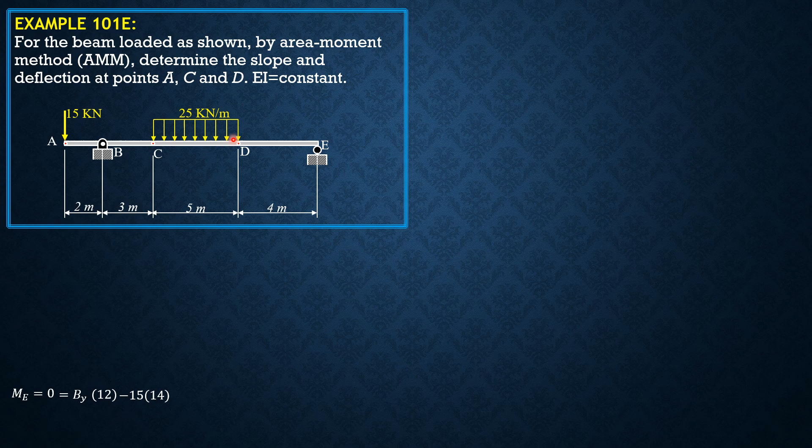So moment at E equals 0, clockwise positive, let's assume an upward reaction at B; horizontal reaction is 0. So we have By times 12, minus 15 times 14, minus 25 times 5, 2.5 plus 4 is 6.5, so 25 times 5 times 6.5. So By is equal to 2045 over 24 kilonewtons.

Then moment at B equals 0. So we have RE times 12 plus 15 times 2, then minus 25 times 5, 2.5 plus 3 is 5.5, so 25 times 5 times 5.5. RE is equal to 1315 over 24 kilonewtons. So from there, because we select D as the moment center, this is 1315 over 24 EI.

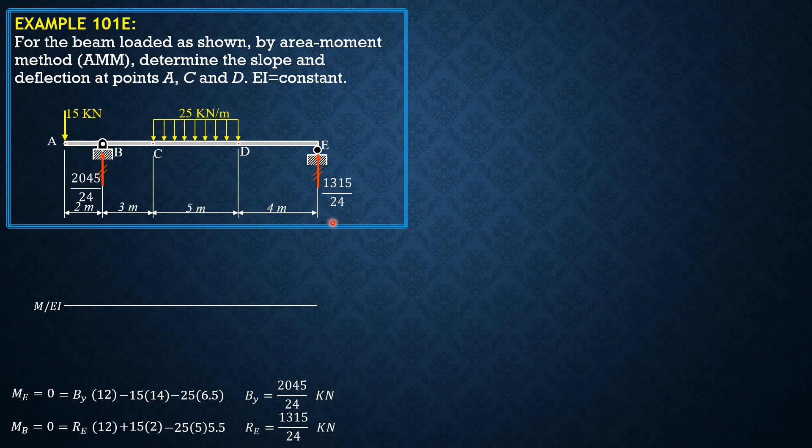So let's have the moment of the loading first. 25 times 5 times 2.5, this is second degree, is equal to 312.5 over EI. Then moment due to 15, 15 times 10 is 150 over EI. Then here we have 15 times 2, so 30 over EI. At C, 15 times 5, 75 over EI. Then here 30 over EI, 15 times 2.

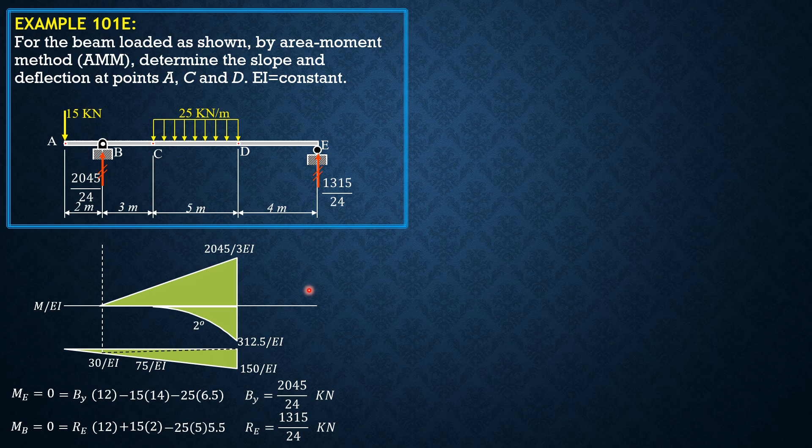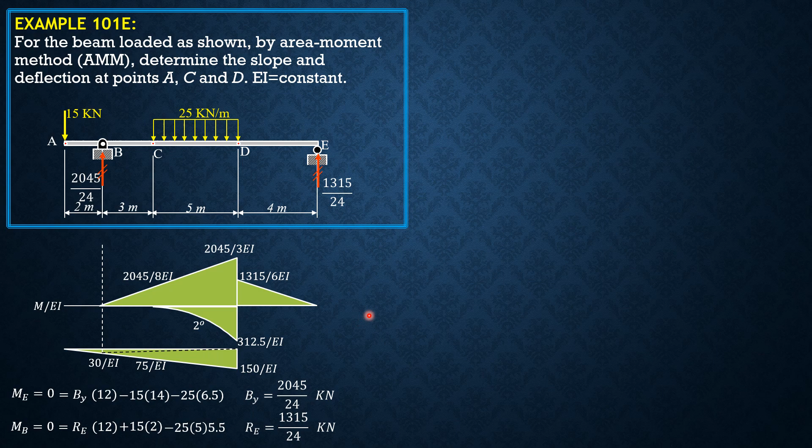So let's compute deviation of E relative to the tangent at B. It is 0.5 of 8 times 2045 over 3 EI. This distance is 8/3 plus 4, because we are computing deviation of E relative to the tangent at B. So the moment arm of the centroid of this triangle from E is 8/3, 1/3 of 8, plus 4. Then plus this area, 0.5 of 4 times 1315 over 6, moment arm 2/3 of 4 or 8/3.

Minus this spandrel, 1/3 of 5 times 312.5, times quantity 5/4. This is 5 over 4. 5 over n plus 2, so 5 over 4 plus 4. We compute the moment of the area from E, so the moment arm should be from E.

Then this small triangle, the distance of the centroid from D is 2/3 of 8, 16/3, then plus 4. So minus 0.5 of 8 times 30 times 16/3 plus 4, 2/3 of 8 plus 4. That's it. Then minus for this big triangle, 0.5 of 8 times 150. This is 8/3, 1/3 of 8 plus 4. So 0.5 of 8 times 150 times 8/3 plus 4.

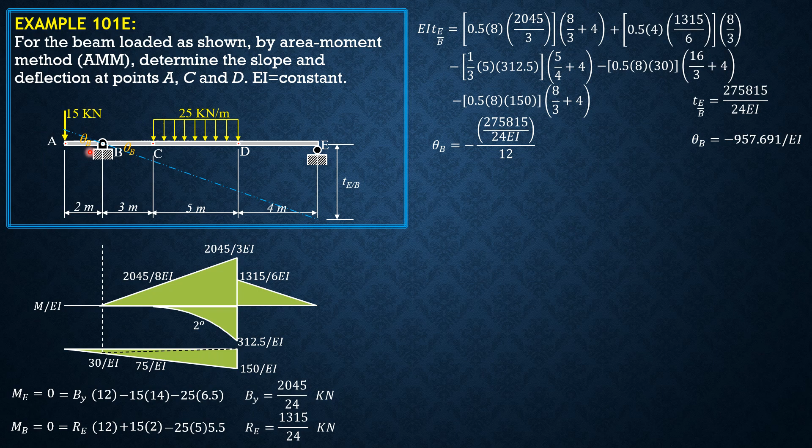So computing for theta B, it is negative of 275815 over 24 EI divided by 12, because that's 12 meters, 3 plus 5 plus 4. So theta B is negative 957.691 over EI in decimal form. So let's concentrate first on AB. Let's compute theta A and deflection at A.

So EI times deviation of A relative to the tangent at B is equal to moment of area between A and B. There is only one area, and this is the area: 0.5 of 2 times 30 over EI. Then its centroid from A, because this is deviation of A relative to the tangent at B, is 2/3 of 2, which is 4/3. So again, 0.5 of 2 times negative 30. This is negative, below the horizontal. Then moment arm is 2/3 of 2, so 4/3. Deviation of A relative to the tangent at B, therefore, is negative 40 over EI.

So let's enlarge this, magnify this portion so that we can analyze it well. So this is the tangent at B, this tangent here. This is the expected elastic curve, because point A on the elastic curve should be below the reference tangent, because it is negative.

Deviation of A relative to the tangent at B is negative, so negative 40 over EI. So this is it. Deviation of A relative to the tangent at B, negative. So point A on the elastic curve is below the reference tangent at B. Therefore, deflection at A is above the horizontal axis of the beam.

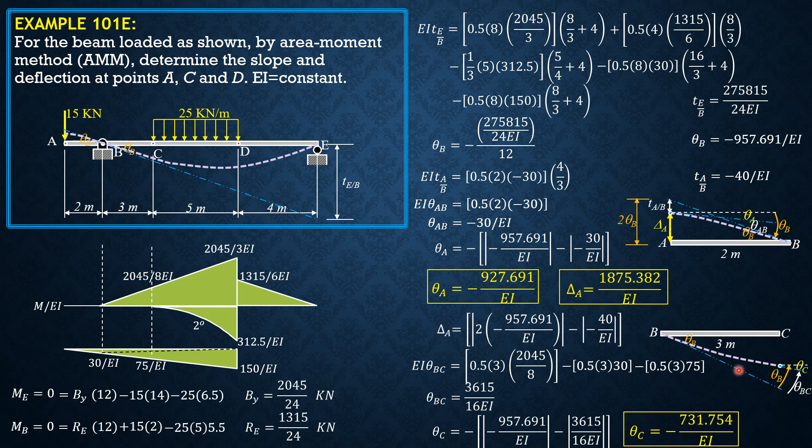So let's have the magnified figure between B and C to analyze delta C. So this is deviation of C relative to the tangent at B, which is expected positive. The distance from C on the beam to the point on the reference tangent is 3 times theta B, because that's 3 meters. And this is the deflection at C, which is expected negative because point C on the elastic curve is below the horizontal axis of the beam.

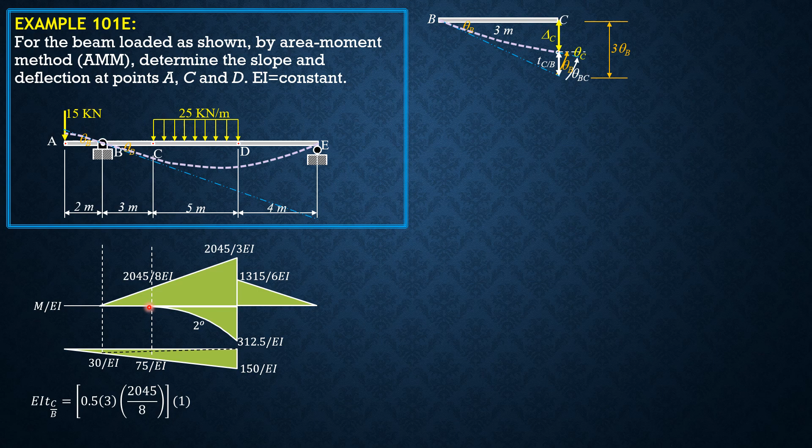So that's delta C. So from the figure, delta C is negative of absolute value of 3 times theta B minus absolute value of deviation of C relative to the tangent at B. So computing for deviation of C relative to the tangent at B, EI deviation of C relative to the tangent at B is equal to 0.5 times 3 times 2045 over 8 EI. Moment arm is 1/3 of 3 is 1.

So this is trapezoid. So considering the small area first, minus 0.5 of 3 times 30 over EI, then 2/3 of 3 is 2 meters. Distance of centroid from C is 2/3 of 3, so 2 meters. For this bigger triangle, minus 0.5 of 3 times 75, 1/3 of 3 is 1. So deviation of C relative to the tangent at B is equal to positive 2895 over 16 EI.

So delta C is negative of 3 times absolute value of theta B minus absolute value of deviation of C relative to the tangent at B, which is 2895 over 16. Expressing delta C in decimal, delta C is negative 2692.136 over EI.

Then, there's no need to magnify portion CD, so we have a space here. So let's evaluate EI theta BD. It is area between B and D. So 0.5 of 8 times 2045 over 3 minus area of spandrel, 1/3 of 5 times 312.5, then minus area of trapezoid, but we'll divide the trapezoid into these two triangular areas. 0.5 of 8 times 30 minus 0.5 of 8 times 30, then minus 0.5 of 8 times 150.

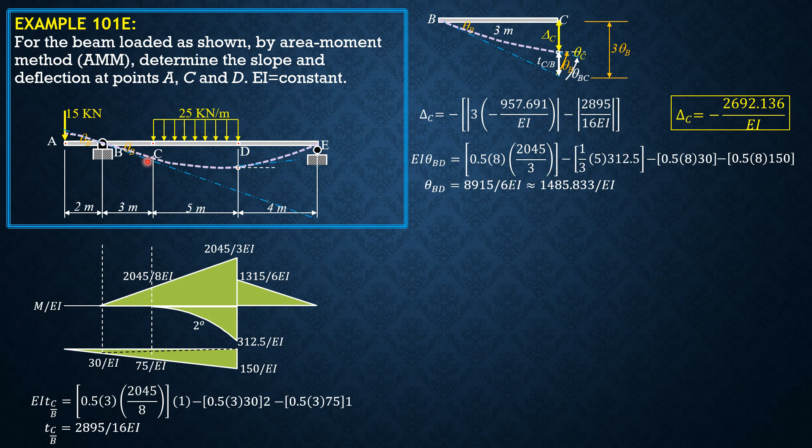So that's theta BD. This is theta B. So the tangent at D is above the horizontal, so it is positive. And this is theta D, which is positive of absolute value of theta BD minus absolute value of theta B. So theta D is absolute value of theta BD minus absolute value of theta B. So theta D in decimal is equal to 528.142 over EI. So you compare this with the answer to example 100E by double integration method.

Then let's evaluate this deviation of D relative to the tangent at B. The distance from the reference tangent to the beam is 8 times theta B, because the distance from B to D is 8 meters, so 8 times theta B, and this is the deflection at D. So the deflection at D is negative of absolute value of 8 theta B minus absolute value of deviation of D relative to the tangent at B. So let's evaluate EI deviation of D relative to the tangent at B.

So let's copy this area, 0.5 of 8 times 2045 over 3 times 8/3. So the moment arm is from the centroid of the area to D, because this is deviation of D relative to the tangent at B. Then minus this area, then this distance is 5/4. So the moment arm is 5/4. 1/3 of 5 times 312.5 times 5/4.

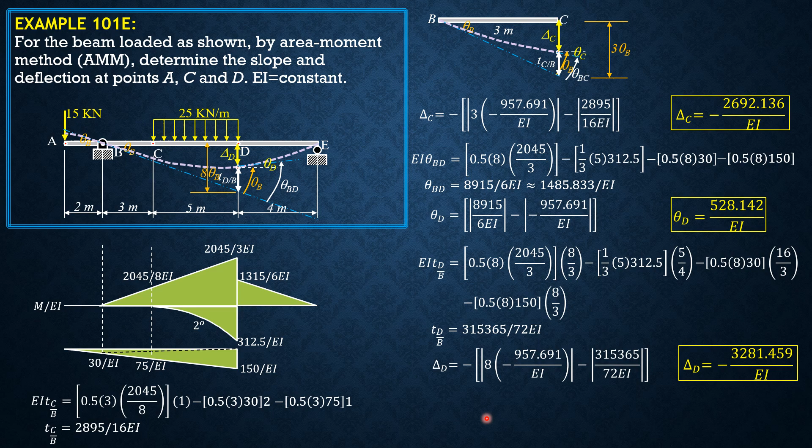So computing for deviation of D relative to the tangent at B, it is equal to positive 315365 over 72 EI. So finally, delta D is negative of absolute value of 8 theta B minus absolute value of 315365 over 72 EI. Expressing delta D in decimal, delta D is negative 3281.459 over EI. So that's it for this problem.